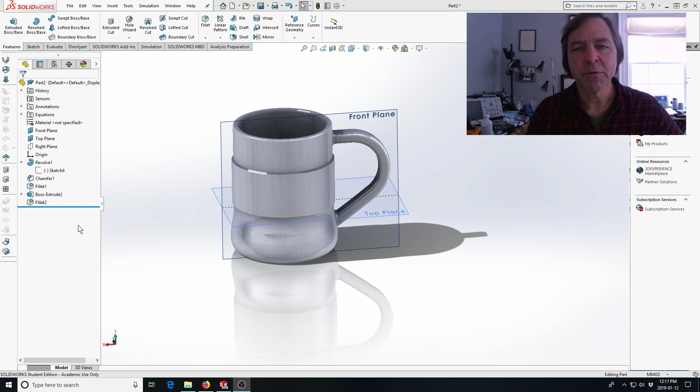Since the first video for this assignment had you make a simple coffee cup, hopefully yours will be more artistic than mine. For those who found that simple and straightforward, how about we make it a bit more artistic? I'm going to try and put some labeling on my coffee cup so people know it's mine.

Here we are with the coffee cup you've already made in the last video, and I made this funny flat band on mine. I think I'd like to imprint some wording on that. Well, there's a tool for that, the wrap tool.

I can select wrap, and first I'm going to do a sketch on a plane that will be the image, or the closed curves, that will be wrapped around a surface eventually. I'm going to write something using the text tool, and make sure my cup says 'Andy loves coffee.' That way everybody will know it's mine.

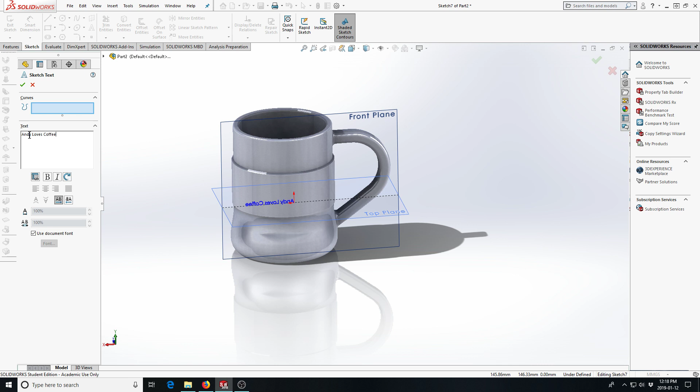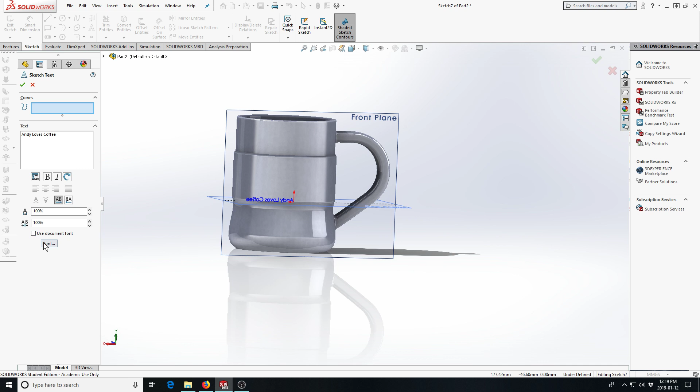Now, if I just leave it like this, it's kind of tiny and in a funny spot. I'd really like to use a better looking font and make it bigger, so I'm not going to use the document font, which is the default for drawings in SolidWorks as you've set it up. I'm going to pick, with this button at the bottom, the font button, a different font.

First of all, 3.5 millimeter height. No, I need to be bigger than that. Let's say 18 millimeters. That makes it bigger. That's good.

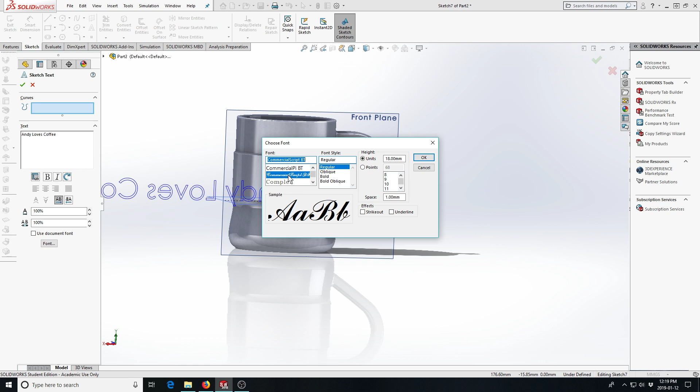I'm not crazy about just Century Gothic, so I'm going to go through the different fonts I've got. Ooh, no, don't like that one. That comic one's always fun. Maybe italic, bold italic. That's better. And maybe there's a better one.

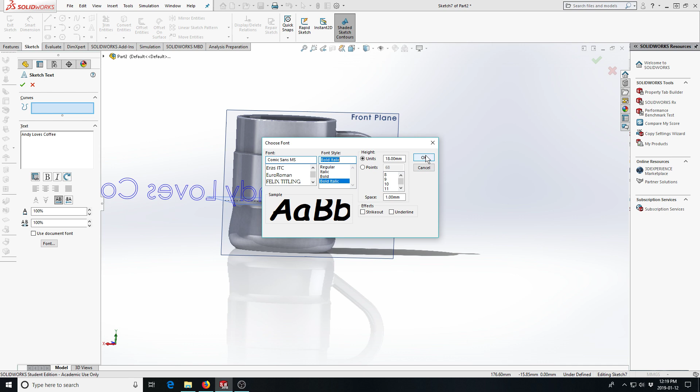You can play around and do whatever you like. You'll see that font is longer than the side view of the cup, but that's okay because it's going to get wrapped around the surface.

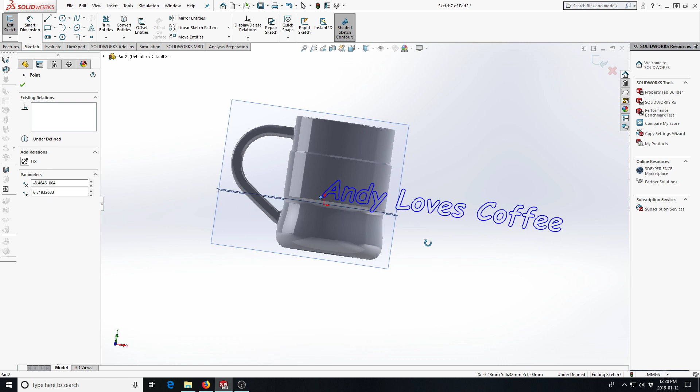I'd like to select that and move it, so I can just move the starting point for the text, and I'll move it up so it looks like it's definitely in the middle of that band.

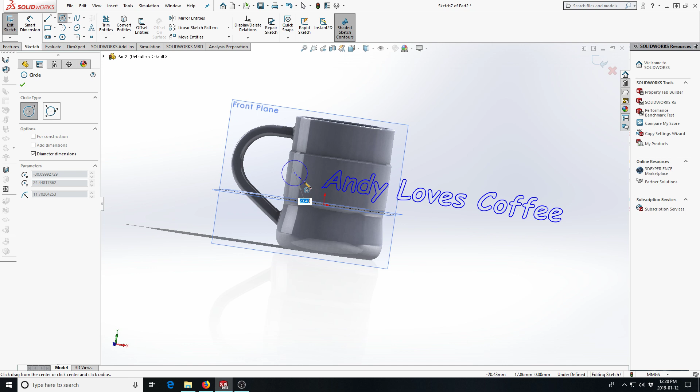Now, because this is just a sketch, I could also add a happy face. But my happy face has to have some eyeballs in it.

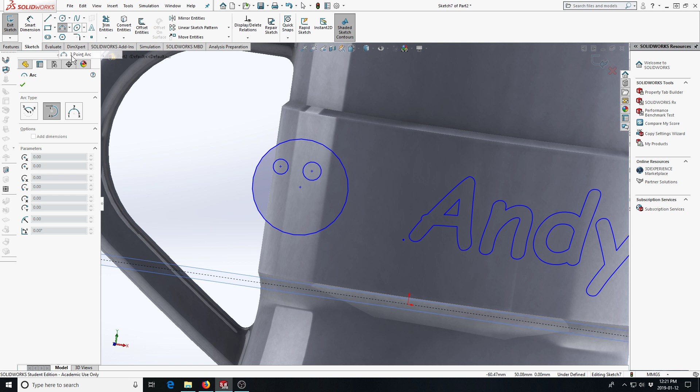We'll make it a wonky happy face with different shape eyeballs. I want to make a 3-point arc. Boom. Don't want a sad one. Oh, that's a good one. I like that.

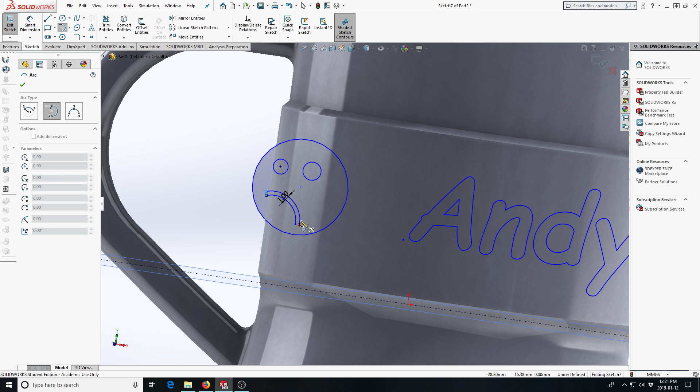Like you've seen before, I'm going to use an offset. I'll offset by 0.5 millimeters. No, I guess I need more than that. Offset by 1 millimeter. And then I'll finish this up with a tangent arc on the end. That didn't work. There we go.

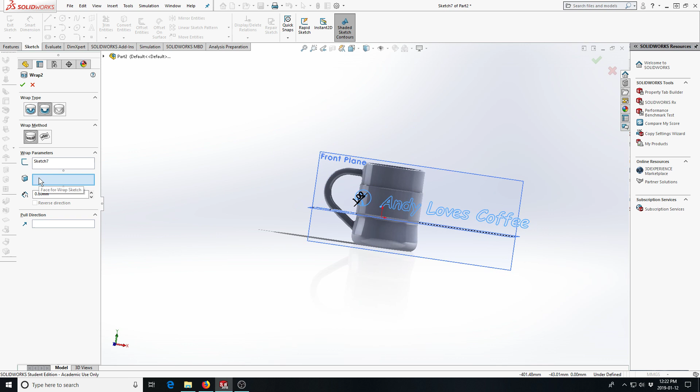Now in the wrap tool, now that I've done this sketch, it wants me to pick a surface, and I'm going to pick that surface. You'll see it does an example showing me what that looks like. And there it is.

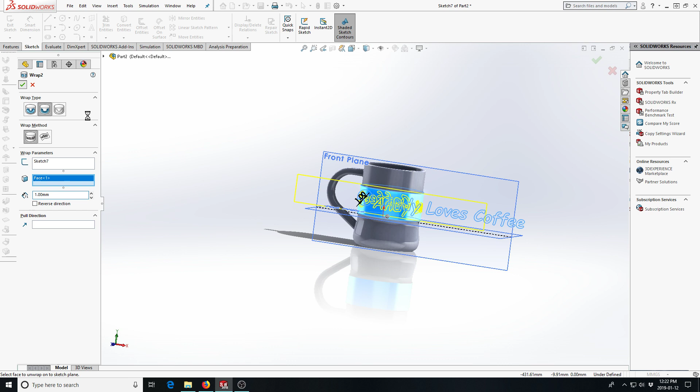Now I could also select how deeply that is carved in. Maybe I want to make it 1 millimeter. There, and you see I've carved that face of my coffee cup with a 1 millimeter deep boss, which is going to guarantee that nobody but me is going to use that coffee cup.

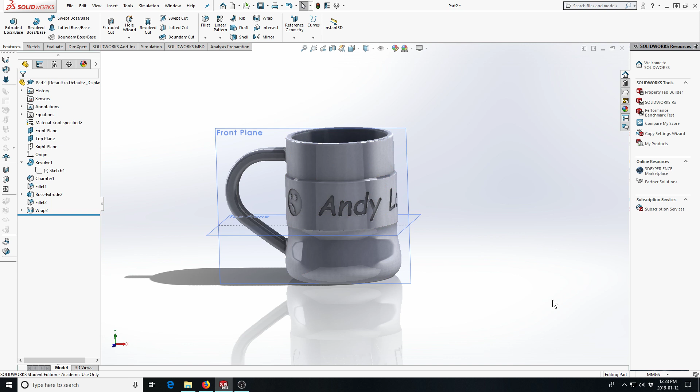Now, if you render it differently, you'll be able to see that come up differently, but you can play around with that as well. There's a lot of tools you can use creatively in SolidWorks to make stuff, not just simple rectangular boring things. You can make things quite simply very, very complicated. So I hope that's helpful. See you soon, thanks for watching.